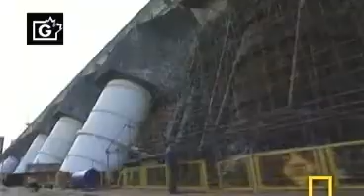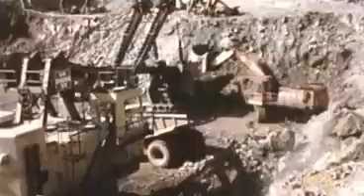It's one of the world's most ambitious engineering projects, a massive hydroelectric dam generating more kilowatts than any other on the planet. To build it, the path of a mighty South American river must be blocked. Thousands of acres of precious wild animal habitat and tens of thousands of homes will disappear in a huge flood. 40,000 workers must battle against the forces of nature, rocketing temperatures, the constant threat of killer floods. Behind it all, the potential for catastrophe. Building the Itaipu Dam will take 7 tough years, and this giant quest for energy will demand a devastating price.

The Rio Parana, at 4,000 kilometers long, it's South America's second biggest river, outstripped only by the mighty Amazon. For part of its course, the Parana marks the border between Brazil and Paraguay. Here, the river's path is barred by a man-made structure, the Itaipu Dam.

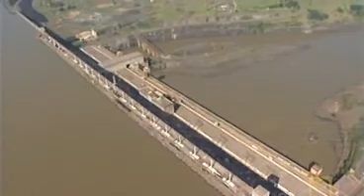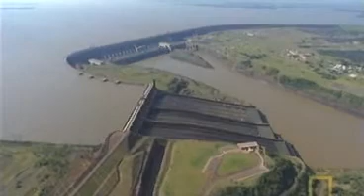It's the world's most powerful hydroelectric dam. It pumps out 90,000 gigawatt hours every year, enough to power Britain's capital city, London, for over 3 years. Stretching for 7 kilometers, it's 2.5 times longer than America's Golden Gate Bridge and stands as high as a 65-story building.

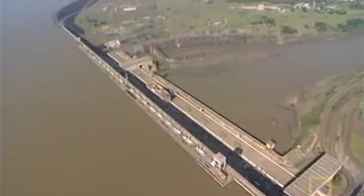It's holding back a body of water nearly 400 times the area of New York's Central Park. Water that plummets through the dam like a giant man-made waterfall to produce electricity. It would take an army of 40,000 workers and $20 billion to build this monstrous structure, almost 50 times the cost of the Hoover Dam.

Italy's Piero Sembenelli was one of the dam's key engineers. Possibly we didn't realize how difficult the project was going to be. It's in one of the remotest corners of the world. But why would the most ambitious and powerful dam on the planet be built here?

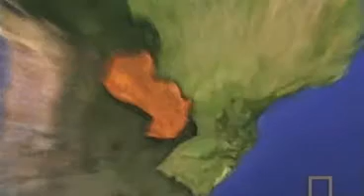It's the 1960s, and Brazil is booming. Its economy is growing by 10% a year, but the population is surging too. Already over 70 million, in 3 decades Brazil's population will hit 170 million and become one of the top 10 most populous countries in the world.

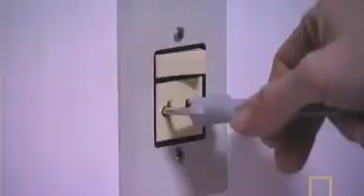Brazil's growth will create a spiraling demand for energy. The government must find a way to satisfy the power-hungry masses of the future or face economic crisis. But how?

The country hasn't got enough oil and gas to head off an energy crisis, and it can't afford to spend big money on fuel imports. But then, someone has a brainwave. Why not use a natural asset that's free and that Brazil has plenty of? Water.

A staggering 10% of all the fresh water in the world is found in Brazil. Its 40,000 kilometers of rivers could reach right around the globe. If the vast potential of water could be harnessed by hydroelectric technology, energy demands could be met without costly fuel imports. Brazil is thinking big. The government wants one massive dam to supply a huge chunk of the nation's energy demands.

Finding the perfect site for such a big dam won't be easy. The river must have a volume of water great enough to produce the energy needed. It must flow through narrow banks, and its bedrock must be strong enough to take the massive weight of the dam walls.

This is the obvious spot. The river Iguaçu feeds one of the biggest waterfalls in Brazil, but it has only 1/8 of the water needed for the monster dam. One by one, engineers check out 50 other sites. None make the grade. But finally, the perfect location is found.

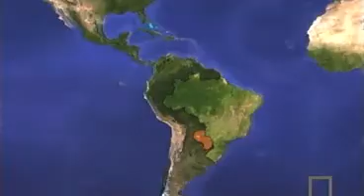But there's a huge obstacle. The gorge sits right on the border between Brazil and its old enemy, Paraguay. In the 19th century, the two countries had fought in a bitter war. Paraguay lost half its territory and half its population was killed. Even over 100 years later, there was still mistrust between the two peoples.

1966, complex negotiations begin between the two countries. For 7 years, the dam project hangs in the balance. But in the end, the lure of vast supplies of energy proves irresistible. On the 26th of April 1973, Brazil and Paraguay finally sign a treaty. The Itaipu Dam gets the green light.

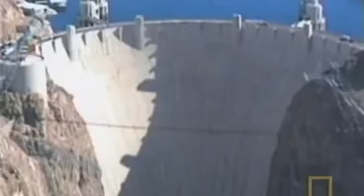If everything goes to plan, it will outstrip some of the world's greatest dam projects. It will be 18 times as long as the mighty Hoover Dam and 9 times as heavy. Most importantly, it will produce 6 times as much electricity.

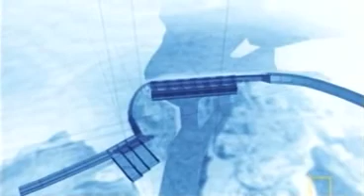The most powerful hydro dam in the world will demand sacrifices. Blocking the Rio Parana will create a huge reservoir needed to feed the electric turbines. It will also submerge the river valley under 100 meters of water. A vast area of farmland and forest must be flooded to feed the monster dam. Tens of thousands of people will lose their homes, and the habitats of thousands of animal species will disappear forever, as the Itaipu project reaches the point of no return.

May 1975. Old enemies Brazil and Paraguay have signed an historic pact. Construction begins to build the biggest hydro dam in the world. It will harness the power of the mighty Parana River. The goal: an energy bonanza for both countries. The $20 billion budget is funded by the Brazilian government and by foreign investors.

Engineers have found a site on the river that's perfect for the dam. But to build it, they must first divert the Parana from the course it has flowed for thousands of years, and reroute it. A massive diversion channel must be carved through the rock of the riverbank, its job to temporarily divert the river away from the dam construction site. At 2 kilometers long and 80 meters deep, it will be the biggest diversion channel ever attempted. But if it fails to divert the river correctly, the whole project is doomed.

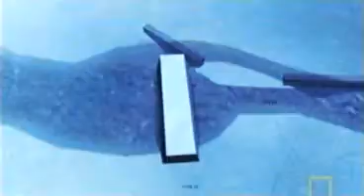While the valuation process is taking forever, the digging of the diversion channel is right on schedule. 3 years after digging began, engineers are all set to demolish the channel's concrete seals and send the Great Parana River pouring down the channel.

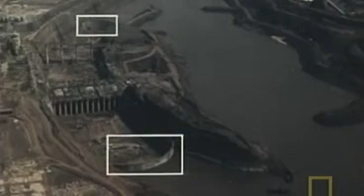8 a.m. on October the 20th, 1978. Dynamite charges are set at each end of the channel. It's a tense moment - if the explosion damages the channel, it could set the project back years.

It was a fantastic moment, incredible moment. The blast was like a firework.

It's working. The mighty Parana is thundering down its new course. It's a momentous achievement. The Itaipu engineers have altered the path of one of South America's biggest rivers.

But it's only phase 1 of the diversion. Some water still flows down the old riverbed. Next, huge temporary dams called coffer dams must be built to force all the water down the diversion channel, away from the dam construction site. They're made by dumping huge pieces of rock into the river until the flow is stopped.

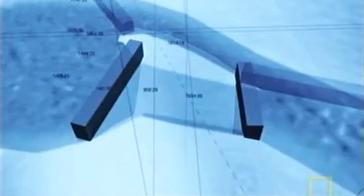The coffer dams might only be temporary, but British engineer Bill Beath knows how secure they have to be. Coffer dams prevent the river from flowing into the area where the dam is being built. Should these collapse during construction, it would be a total disaster.

Brazil has some of the most torrential rainfall in the world, and rising water could put the coffer dams under pressure or even burst the walls. That would bring a devastating wall of water down on hundreds of workers. The engineers hope that they would have enough warning of rising river levels to safely evacuate workers. Until the main dam walls are built, all that stands between the workers and the threat of flood is a wall of rubble.

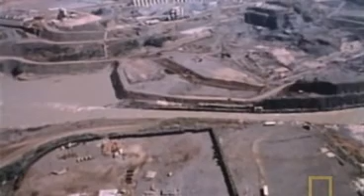With the River Parana now fully diverted, the biggest job of all, building the huge walls of the Itaipu Dam, can begin.

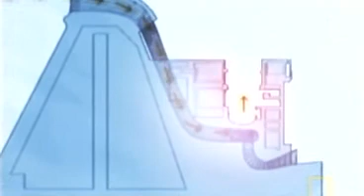A hydroelectric dam works by dropping water onto turbines, making them turn at great speed to create electricity. The taller the dam, the greater the drop, and the more power is produced. Itaipu's engineers know that the water in the dam must fall a full 100 meters to produce the promised record-breaking amounts of power. But the riverbed is only 50 meters deep.

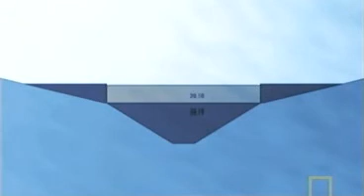Their solution? Build a series of secondary dams. These will raise the height of the main concrete central dam and make it tall enough to do the job. It means running the dam structure right across the valley for 7 kilometers.

Autumn 1975. Work starts on the secondary dams. Meanwhile, the valuation of the houses, farms and land in the river valley, which the dam will flood, is completed. Brazilian and Paraguayan authorities learn that before they can submerge the area, they must buy up 8,500 homes and farms. The cost? $500 million in today's money. That's on top of the $20 billion the dam itself will cost to build.

Offers of compensation are rushed out. Most are accepted, but a handful of people mount legal challenges.

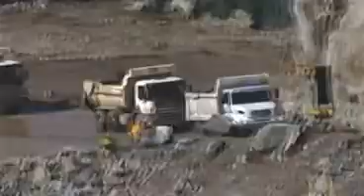But engineers are more worried about keeping the secondary dams on schedule. They desperately need more workers, an army of them. Yet the Parana Valley is sparsely populated and remote. Its only town, Foz do Iguaçu, is a small frontier settlement. The nearest big city, Sao Paulo, is 1,000 kilometers away.

Project managers must choreograph a massive migration of workers into the area. They bus in tens of thousands of workers from all over Brazil. Everything a large town needs, from schools and hospitals to churches and kindergartens, has to be built. New housing estates are built just for dam workers. Massive catering production lines are set up to feed the ever-increasing number of workers. The town of Foz do Iguaçu is growing at an incredible rate.

We're really talking about moving into a one-horse town with something like 30,000 workers. What was once a tiny backwater becomes a gold rush town practically overnight.

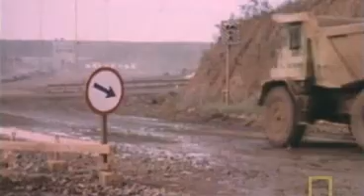While the new workers set to work on the secondary dams, the engineers are wrestling with the design for the vast main dam that will block the river at its deepest point. All dams must be capable of one thing. They must resist the unimaginably vast pressure of the water in the reservoir behind them.

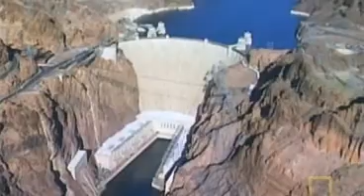Where geography allows, dams can be simple walls anchored to the surrounding rock. But Itaipu has no such help from the terrain. It must stand alone. So Itaipu must follow a design that relies solely on its own weight. Engineers call it the gravity dam. The idea is to make the structure so heavy the water simply can't move it. To work, the dam will have to weigh 61 million tons.

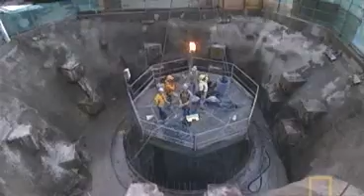But the dam is only as good as its foundation. The bedrock must be incredibly strong. Any weaknesses could cause the dam to collapse, an unthinkable disaster. The engineers have undertaken a detailed survey. The results are good. The dam's foundations are sound.

And the engineers have a money-saving trick up their sleeve. A dam made out of solid concrete would weigh more than it needs to and add huge unnecessary costs. They plan to make the main dam walls hollow. As long as it has enough weight, it will resist the water pressure. That does not mean that it has to be absolutely solid. It can be hollow and still resist the water pressure.

Making the dam hollow means its base can be made even wider with the same amount of concrete. And the walls will slope more gently, pushing the water pressure down to the base where the dam is strongest. It also means the power generating equipment can be housed inside the dam itself. It's a clever solution.

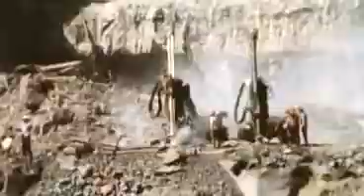June 1979. Preparation for the main dam is well underway, and the managers are determined to stay on schedule. Everything is going smoothly. But then the work comes to an abrupt standstill.

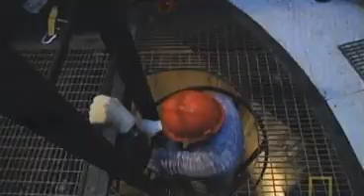There's a problem with the bedrock. As we dug into the foundations, we discovered that the conditions weren't exactly what we had expected. It's disastrous news. The survey gave the bedrock a clean bill of health, but now engineers have come across a weak layer of crumbling rock, like a rotten tooth, 20 meters down. The engineers fear it won't support the weight of the dam. If they carry on building, the dam will collapse.

Tunnels are dug down through the rock so that engineers can investigate the suspect layer. Only a thorough underground inspection will reveal the scale of the problem. They pray it's just one bad pocket of rock. Engineer Corrado Piacentin probes the secrets of the bedrock.

This is the good rock, and this is the jointed weak rock. As you can see, it's very soft and not good for a foundation. The crumbling rock stretches right through the dam's planned foundations. Building an 11 million ton dam on top of this would be criminally irresponsible. Engineers need to come up with a solution, and fast.

Workers stand idle while engineers and geologists wrestle with the problem. Finally, they hatch a plan that might just work. They can't build on the crumbling rock layer, but can they replace it? Like demonic dentists, the engineers drill out the decaying rock and give it a massive filling with extra strong concrete.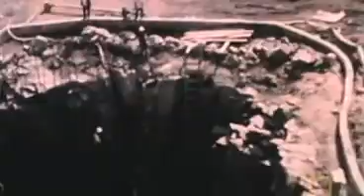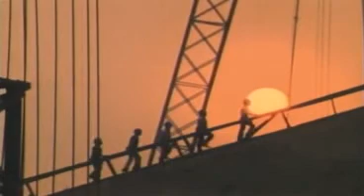It's doing the trick, but the extra work will take months and add $20 million to the budget. Fixing the crumbling rock layer could put the whole dam building schedule in jeopardy. And the relentless heat of the Brazilian sun is about to give the engineers another headache.

May 1982. The 40,000 workers building the Itaipu Dam in the heart of South America have been grappling with a potentially catastrophic problem. Fractured bedrock beneath the foundations could cause the massively heavy structure to collapse. At stake, the supply of energy to Brazil's future generations.

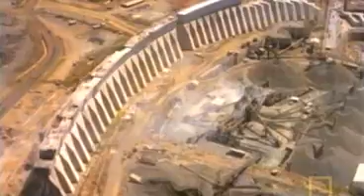Engineers have come up with a solution, and it seems to be working. Like a bad tooth, the rotten rock layer beneath the Itaipu Dam site is being drilled and filled with extra strong concrete, so that it will take the weight of the dam.

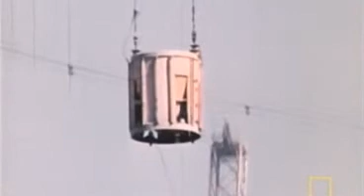At the same time, work on the dam's giant central walls continues. Workers must construct 18 concrete blocks, each 4 times as high as New York's Statue of Liberty. Every block will be cast separately. Huge steel structures are erected to receive the concrete and hold it in place till it's set.

But it's not just the scale of the job that sets the engineers a major challenge. If they pour this amount of concrete the usual way, it just won't set properly.

When concrete sets, the cement reacts with water, creating heat. In smaller concrete blocks, the core temperature cools and sets relatively quickly. But in massive blocks of concrete, the core temperature stays high longer. And as the surface cools and sets at a faster rate than the core, hundreds of cracks can appear, fatally weakening the concrete.

And that's not the only problem. Temperatures here can easily soar past 40 degrees centigrade. If the huge blocks were allowed to set in the sun, they could reach more than 90 degrees. This too would cause weak spots and cracks.

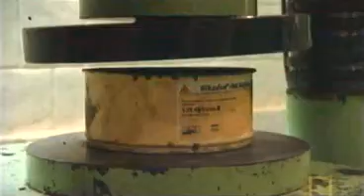Engineers conduct test after test on concrete set in these conditions to see how it reacts to extreme pressure. Even good concrete has a breaking point. Concrete dried by the sun will be much weaker. A solution must be found.

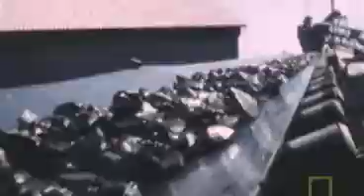The engineers have been wrestling with the concrete problem. Their answer? Refrigeration on a vast scale. Two huge cooling plants will chill every gram of concrete.

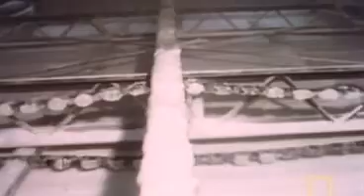Engineer Adalberto Chanu recalls the scene. The stone was washed with icy water and blasted with cold air. Using a large number of ice chips, we were able to produce concrete with a mean temperature of just 4 degrees. And because we had an efficient transportation system, the concrete only reached 7 degrees by the time we were pouring it into the molds.

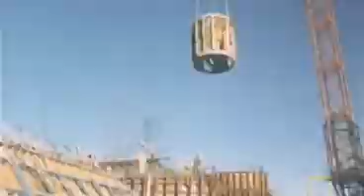The scale of the refrigeration job is vast. The 2 plants have the cooling capacity of over 50,000 domestic freezers.

By June 1982, the race is on to stay on schedule for the dam's completion in just 3 months' time. 7 vast overhead cableways now feed the dam's insatiable hunger for concrete from 6 huge production plants.

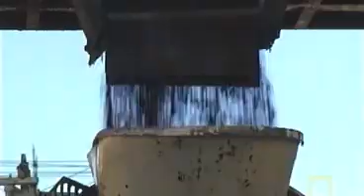This cement was being trucked in over thousands of kilometers. At one time, something like about 1 40-ton truck every 20 minutes was coming in with cement.

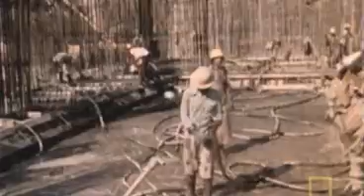40,000 people are working at a pace equivalent to raising a 20-story building every 55 minutes. As the project nears 0 hour, the pace is increasingly fierce.

Adalberto Chanu ran the work schedule.

During construction, we had really tight deadlines. We worked in 2 shifts of 12 hours for almost 360 days a year.

As the countdown to the dam's completion and the valley flooding begins, conservationists begin their evacuation of wildlife. They hope to save 30,000 animals, relocating them to new areas or to wildlife sanctuaries. The rescue team knows that it's a race against time to save as many animals as possible before the flood.

At the same time, the massive task of relocating over 8,500 families is underway. Compensation claims have been settled in lengthy negotiations and court cases. Some have been given money, others will be given a similar property and land elsewhere.

Some of these families have lived and farmed in the Parana Valley for generations. For many, it's a devastating moment as they leave their homes forever.

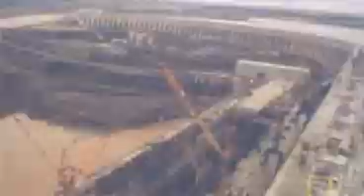The 7-kilometer string of dams is finally complete. Itaipu takes its place as one of the longest and most impressive dam structures in the world.

But the next step is absolutely critical. Engineers will now close off the channel that diverts the Parana River. The river will then slowly flood the entire valley, creating the vast reservoir that will feed the dam and drive its power-generating turbines.

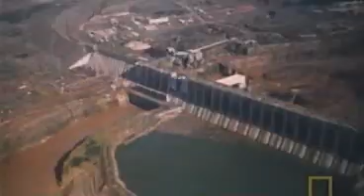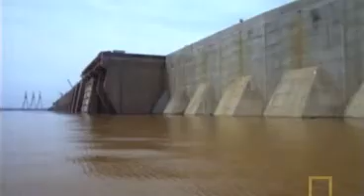Once filled, the water pressure in the Itaipu Dam's reservoir will be like 4,000 bulldozers pushing ceaselessly against the dam walls. The engineers have done highly detailed calculations, and they're confident that the massive walls are more than strong enough to hold back the water.

But the filling of any dam reservoir is a critical moment. The concrete of the dam walls will be all that stands between the vast reservoir and 280,000 people living in and around Foz do Iguaçu.

The failure of any major dam is always a major disaster because the amounts of water that would be freed would create a wave that would flow down the river and create tremendous damage.

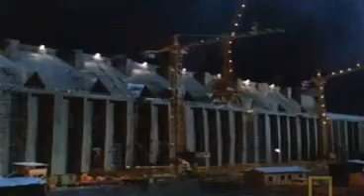If the walls of Itaipu were to fail, the escaping wave of water would dwarf all but the most extreme flash floods Brazil has ever seen. A city-sized body of water would charge down the Parana Valley. The wave could reach 50 kilometers an hour and demolish all in its path but the most substantial buildings.

The death toll would depend on whether people living in the valley had any warning of the impending flood.

June the 3rd, 1976. The Teton Dam in Idaho, USA is being filled for the first time. Engineers spot a crack in the walls and try to repair it. They fail.

2 days later, the western third of the dam simply disintegrates. Erosion at the base of the earth and rock dam is blamed. Nobody had warned local residents.

The Teton Dam burst causes hundreds of millions of dollars in damage to property, livestock and crops. But miraculously, only 11 people are killed.

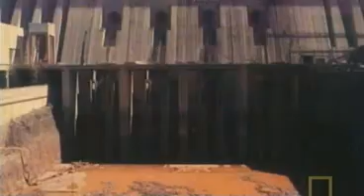October 1982. 7 years since construction began, it's the big day. The massive sluice gates in the diversion channel are closed.

The River Parana flows once again down its original course. It pours over the cofferdams. It charges into the reservoir. Whatever happens, there is no way to stop the water now.

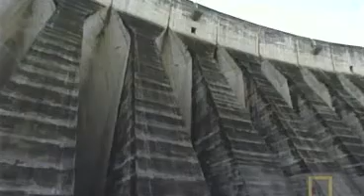As the water rises, more and more pressure is put on the huge concrete walls. The reservoir will take 14 days to fill to its final depth of 100 meters.

Everyone has been evacuated from the flood area, but some stay to watch their homes disappear under the rising water.

An army of 316 conservationists from Brazil and Paraguay set out on one last mission to save as many animals as possible from drowning.

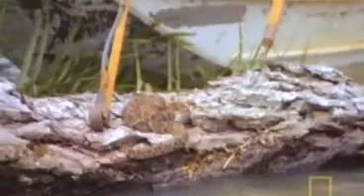As the water levels slowly rise, small islands of high land are left behind. They're only temporary, and in a few hours they'll disappear forever beneath the surface. For now, they provide a last desperate refuge for terrified animals.

Like modern-day Noahs in tiny arks, Fernão Carbonar and his rescue team try to save as many as they can before it's too late. We used some nets, we used some hooks for the snakes, and some of them we just caught them by the tails.

Soon, the animals have only treetops to cling to above the rising water. And there are hazards for the rescue team, too. The water was high, so you can imagine yourself going by boat on a treetop. You didn't really know what to expect to find between the leaves. Sometimes you just look to your right, and about 20, 30 centimeters away, you had a rattlesnake or some other kind of poisonous animal. But apart from the odd scratch and bite, the rescuers managed to avoid serious injury.

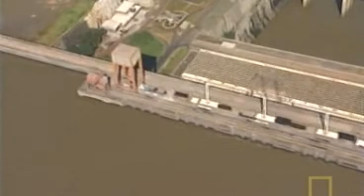For days, the rescue progresses as the floodwaters continue to rise. Within 2 weeks, a vast stretch of the Parana Valley is lost forever. Itaipu's reservoir now stretches as far as the eye can see. The dam's giant walls are holding back the water, but now the engineers must stop it rising any further. If the water flows over the top of the dam, the walls could be weakened and even start to crack, with potentially catastrophic consequences.

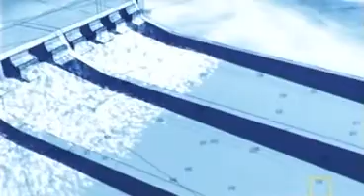Engineers have a trick up their sleeve. A crucial escape chute called a spillway has been built at the edge of the dam. It's like a giant version of the overflow of your bathtub. When the water gets too high, it drains away without causing a flood. The big difference is this overflow must cope with 64 million litres of water per second.

If it's been wrongly designed, the force of the water could damage it, setting the project back years. But there can be no rehearsals. The first time the spillway is used will be for real.

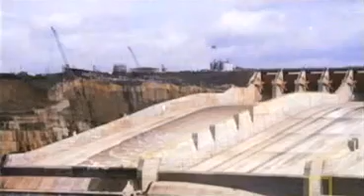October 1982. Excited crowds and world media gather to watch the big event. Engineers prepare to lift the sluice gates and open the spillway for the first time. The water begins as a trickle. It soon becomes a raging torrent. It's working. The spillway is taking the strain. It's controlling a cascade of water 22 times bigger than Niagara Falls. Brazil is now home to the biggest man-made waterfall on the planet.

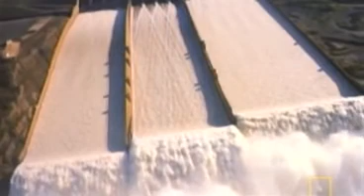Engineer Adalberto Chanu witnesses the moment. It was a really unforgettable spectacle, and it will remain engraved on my memory forever.

The engineers are relieved and elated for now, but their spillway worries aren't over yet. The spillway is handling the volume of water, but they know that all that water thundering off the end could affect the dam itself.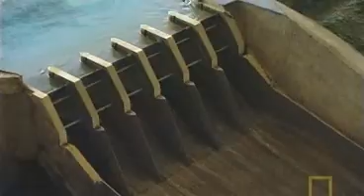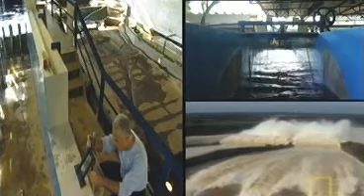At the Furnas lab in Rio de Janeiro, Roberto de Souza builds detailed high-tech models of dams to analyze the consequences of even the smallest miscalculation in spillway design. With this scale model of a dam spillway, we're carrying out an extremely detailed study of the effects of the water as it falls, of the energy that it can produce, energy that may damage the structure itself.

When water crashes off the end of the spillway, it lands below the dam with great force, churning up the river. This energy must be dissipated using an upward curve like a ski jump that forces the water up into the air, reducing its force. The energy dissipation is so important that you could say a good design of spillway can avoid damage to both the actual structure and the land downstream.

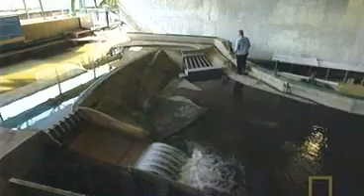Engineers relied on scale models to get the angle of the ski jump just right. If it's wrong, the water will turn back on itself and could seriously erode the riverbank. And if the process continued over years, it could eat away at the foundations of the dam. Itaipu's engineers have calculated that there will be some erosion, but not enough to do any serious damage. All they can do for now is keep checking the riverbank and hope. If they've got it wrong, the structure of the dam itself could be in peril.

The vast reservoir feeding the Itaipu Dam has been filled, flooding thousands of square kilometers of agricultural land and rainforest. 30,000 assorted birds, mammals and reptiles are saved from drowning by conservationists, but they all need new homes. Some are relocated, but 300 rescued animals are found a new home in a wildlife sanctuary.

The Bela Vista Refuge isn't a zoo. The endangered species that were saved will be bred here and ultimately returned to the wild. Bela Vista is also one of the first centres aimed at educating local people about the wildlife living around them.

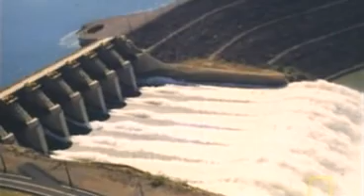Over the next 9 years, Itaipu's final frenetic stage unfolds. With the dam walls finished, work begins on the power generating plant.

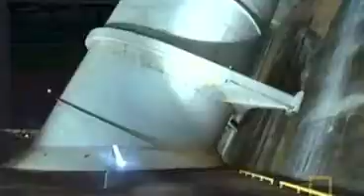18 giant tubes to funnel water to the turbines, each as tall as a 30-story building, go up. The turbines themselves weigh 800 tons, as much as 2 jumbo jets. They're so huge that special vehicles have to be built to transport them.

At the heart of each turbine lies a rotor. They will spin magnets within a copper coil to produce electricity. Although the rotors are more than 16 meters across, they must be precisely installed to within 1/10 of a millimeter.

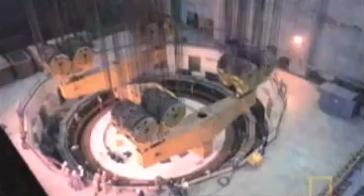And that's not all. The bulk of Itaipu Dam's electricity is destined for the huge cities of Sao Paulo and Rio de Janeiro, but they're over 1,000 kilometers away. A massive network of pylons stretching right across the Brazilian countryside is erected. The electric power lines from the dam are long enough to stretch around the globe 1.5 times.

As the dam nears the moment when it will produce power, engineers nervously inspect the riverbank for signs of damage from water thundering down from the spillway. This is the kind of erosion that huge volumes of water can do when traveling at high speed. How serious is the erosion caused by the spillway? It doesn't look good.

The engineers take precise measurements. They make further calculations. Is the erosion creeping ever closer to the dam's foundations? To their great relief, the engineers find their original predictions are right. The erosion is not getting any worse. The foundations of the dam are safe.

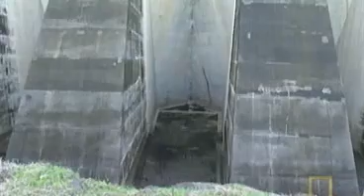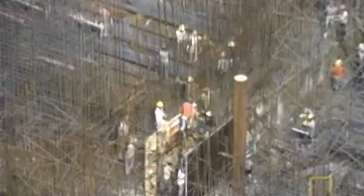Itaipu nears completion. The pace has been unrelenting. But the biggest engineering project South America has ever seen comes at great human cost. Records aren't precise, but 145 people are thought to have lost their lives in accidents while building Itaipu.

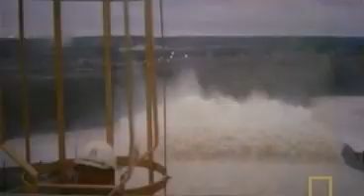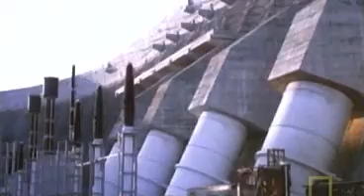May 1984, and Itaipu is about to fulfill its purpose and produce its first electricity. It's the moment everyone has been waiting for, the culmination of 9 years of grueling work. Water pours in through the gates at the top of the dam, thunders down and turns the turbines. For the engineers and workers, it's a triumph.

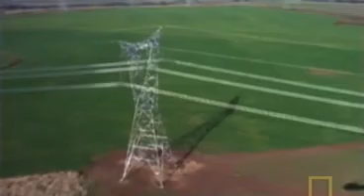One by one, further turbines leap to life, and in April 1991, Itaipu becomes the most powerful hydroelectric plant on the planet, pumping out enough electricity to light up 120 million light bulbs. And Itaipu is now feeding the energy demands of 24 million Brazilians in Rio de Janeiro and Sao Paulo.

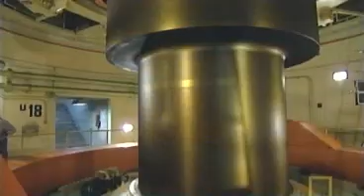The electricity flows without a hitch for 10 years, until January the 21st, 2002, 1:30 p.m. Without any warning, 13 of Itaipu's 18 giant turbines suddenly grind to a halt. Electricity production stops. The engineers at Itaipu are mystified. What has gone wrong? Rio and Sao Paulo are brought to a standstill.

Traffic lights stop working, causing 30-mile backups. Subway systems close down. People are trapped in elevators. Offices, homes, factories are plunged into darkness. What is causing this cataclysmic power failure?

Jose Ricardo de Silveira was in charge of power output. All the generators and all the transmission systems for Brazil suddenly cut out. At the time, we didn't know exactly what was going on.

After frantic investigations, electricians finally track the problem down. A power line has collapsed. The transmission system can't cope with the power level that Itaipu is generating. It's tripped the switch that turns off the mighty dam's generating system.

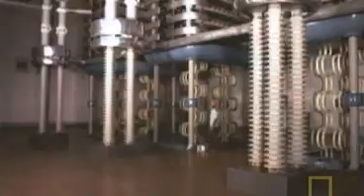There's an inquiry. The result? $12 billion are poured into upgrading the transmission system to prevent future blackouts. In just one afternoon, Brazil's cities have seen just how dependent they are on Itaipu's electricity.

20 years on, the Itaipu Dam remains an extraordinary achievement and was recently voted one of the 7 wonders of the modern world by engineers.

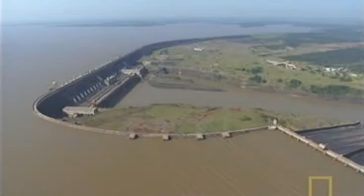Today, a staggering 90% of Brazil's energy is generated by hydroelectric dams. Dams like this have helped Brazilian cities and industries to grow and brought electricity to people in remote areas of the country. But the heavy reliance on water power has come at a price.

In recent years, lower rainfall levels have reduced the power output from dams, forcing power cuts and energy rationing. And all around the world, there's a growing awareness of the environmental havoc that hydroelectric dams can cause. At Itaipu, dead treetops serve as a powerful reminder of a valley that has gone forever, and the enormous price Brazilians have paid in their quest for power.